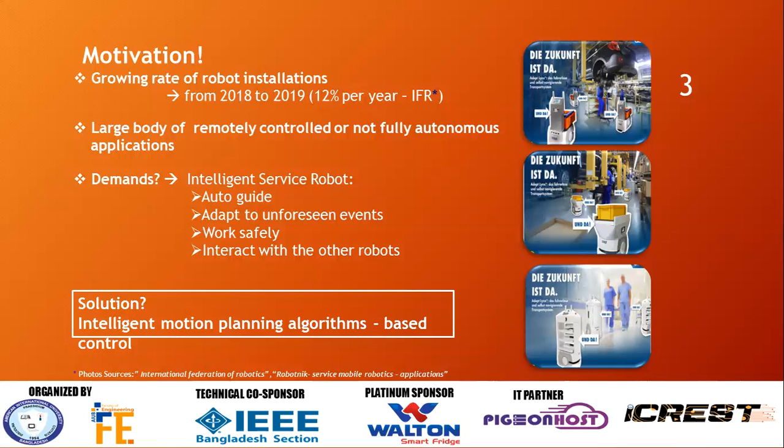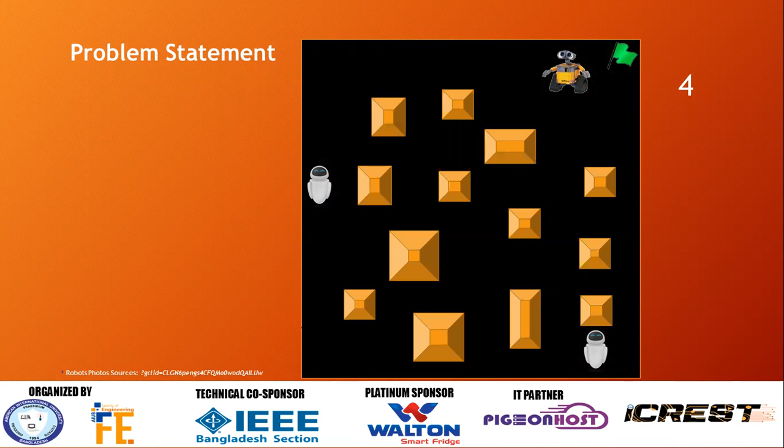The problem statement is a multiple mobile robots workspace with many static and dynamic obstacles in different shapes and locations. The mission of each robot is to plan its own optimal motion from the start point to the target point. So the first question to be answered: which path to take in terms of optimality?

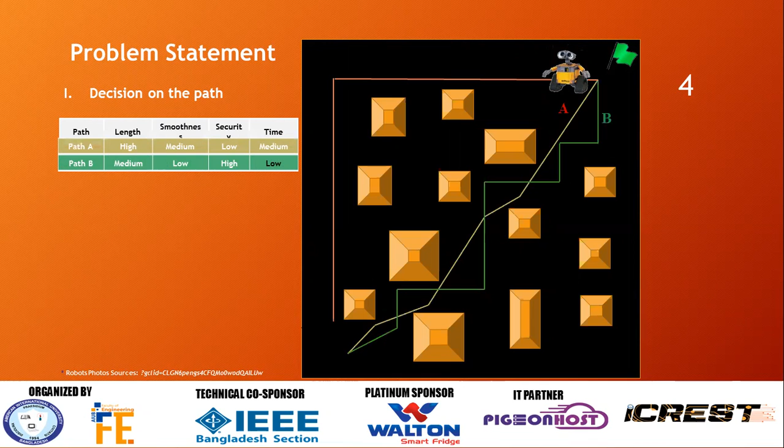As can be seen, although path A is the shortest one, it has the lowest safety performance. Even though the best safety performance is in path B, its length and smoothness are not the best. On the other hand, the best smoothness performance is at path C with minimum number of line segments, even though it is the longest path.

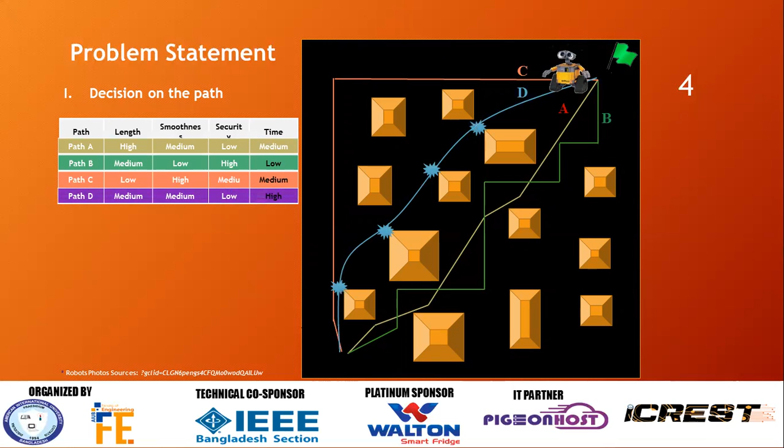And path D has a minimum time smooth curve. Nevertheless, it has low safety performance. So the second question to be answered: how to generate an optimal path as a trade-off among all of these objectives, as can be seen in the dotted path.

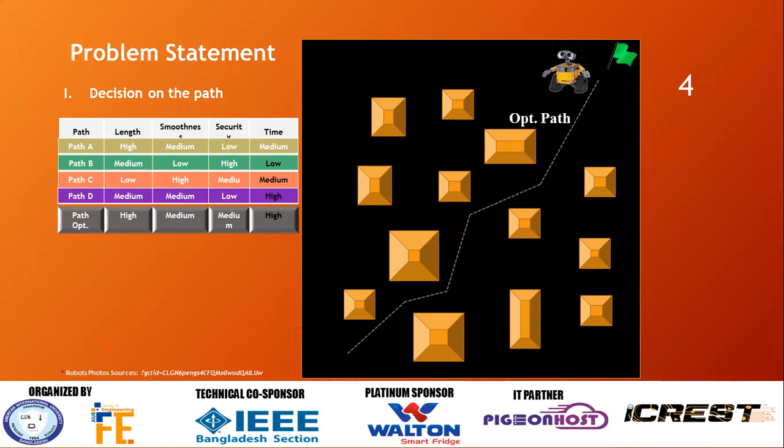And the third question to be answered: how to coordinate with other robots and avoid the collision with them and unknown dynamic obstacles. To solve all these problems, we need an efficient motion planning algorithm.

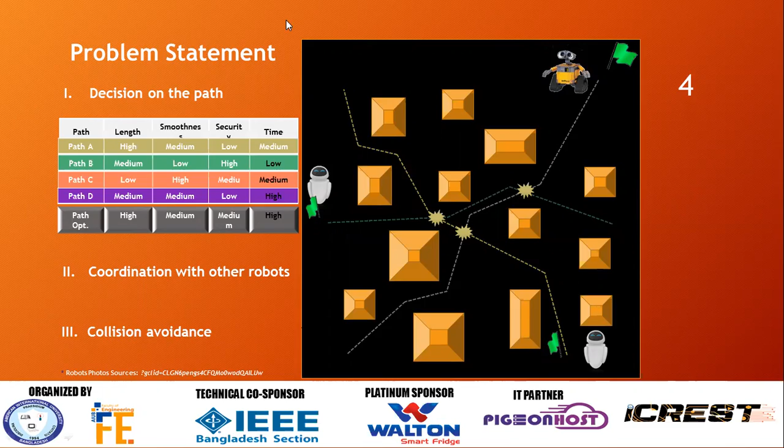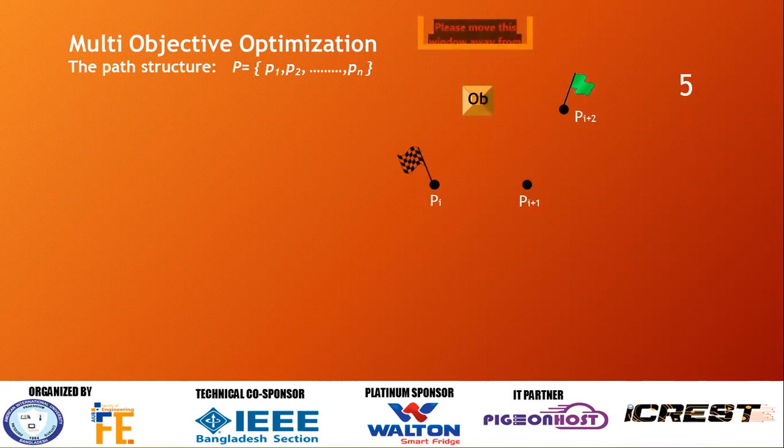Multi-objective optimization. The feasible path structure contains a set of points from the start point to the target point. The fitness function in our proposed scenario is a weighted summation of multiple objectives in terms of length, smoothness, safety, and time.

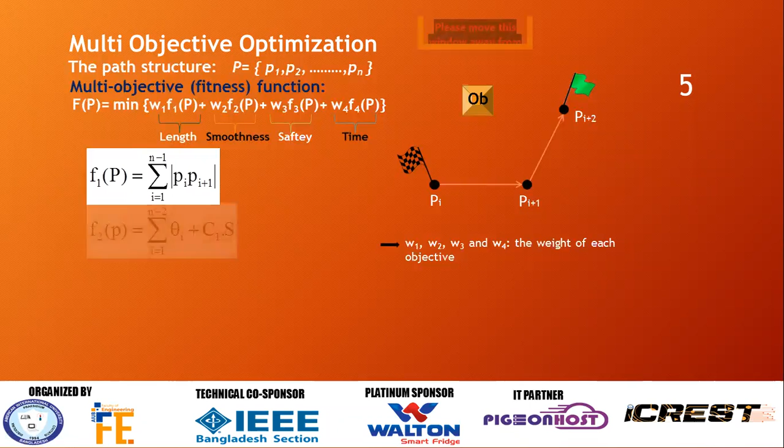F1 is the total length of the path, which is computed by Euclidean distance. F2 is the path smoothness, which means total angles of all path line segments and the number of line segments in the path. F3 is path safety, which means the sum of shortest distance between each path point and obstacle. F4 is total time for robot motion from start to the target point.

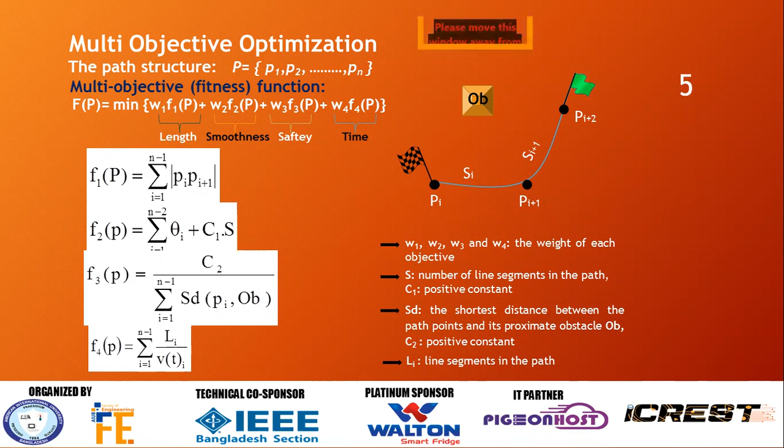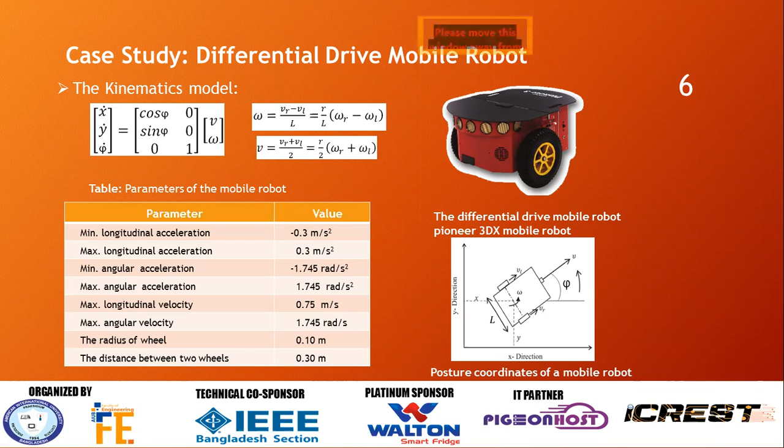So by minimizing the overall fitness function regarding the assigned weight of each criterion, a suitable optimal path will be obtained. Case study. The kinematics model of the robot case study that has a differential drive system is used. This table shows the values of model parameters for the mobile robot that are used for trajectory generation.

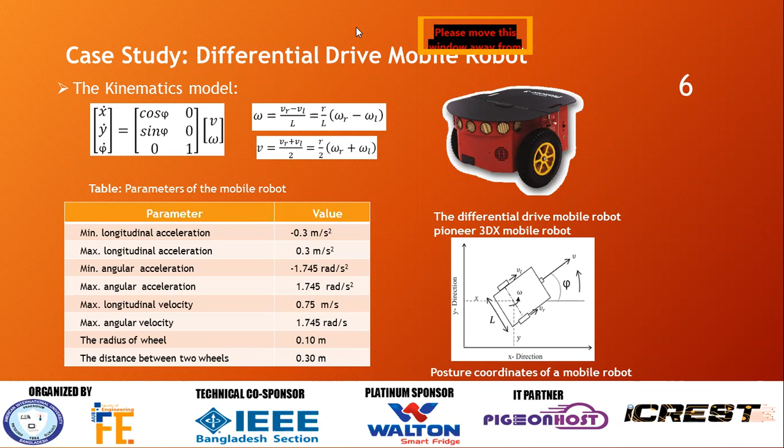In the first part of the study, a new proposal for finding the optimal path by mobile robots in a static environment is introduced, wherein the path planner is designed on this basis that included a modified genetic algorithm using the A-star algorithm.

And in the second part of the study, fuzzy logic control has been proposed and integrated with the selected algorithm for multiple objective optimized path planning individually and collision avoidance between each robot and other obstacles. So in this scenario, each robot is considered as a dynamic obstacle by another robot. So the second part of the work was designed as a motion controller to avoid such collision.

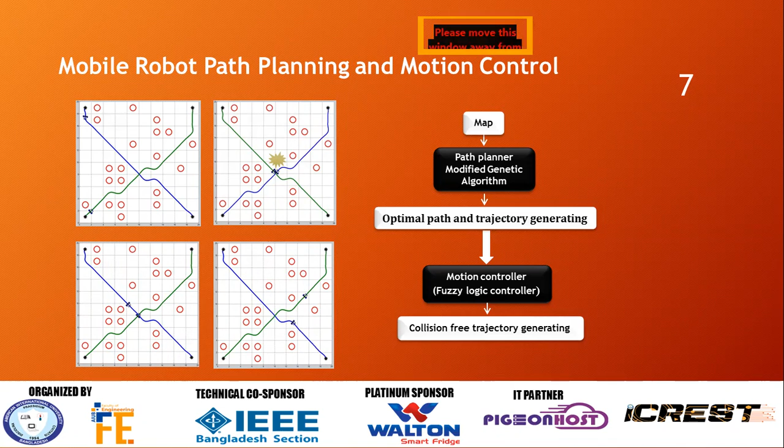And in this part, a fuzzy inference system was designed to safely avoid the collision by slowing down the low prioritized mobile robot. So the proposed fuzzy logic controller is based on the exact location of robots to be controlled, and one of the robots will be considered as a higher priority than the other robot.

So the designed controller has two inputs, namely the planned velocity of the controlled robot and the distance between robots, and one output named controlled velocity. For the planned and output velocity, 9 membership functions have been used. For input distance, 2 membership functions have been presented, where each function has a particular description.

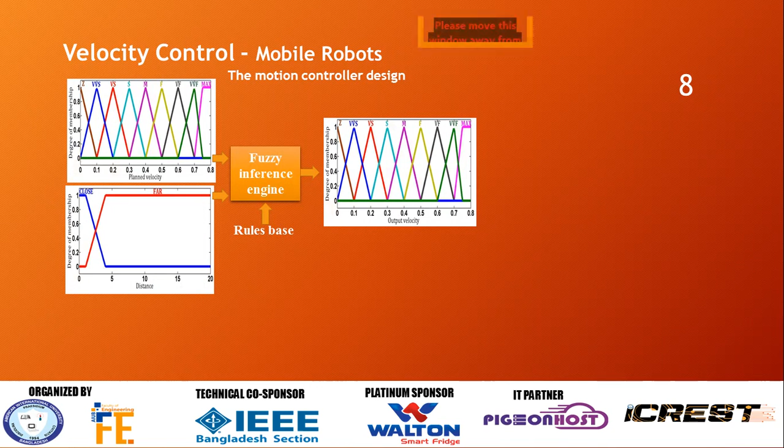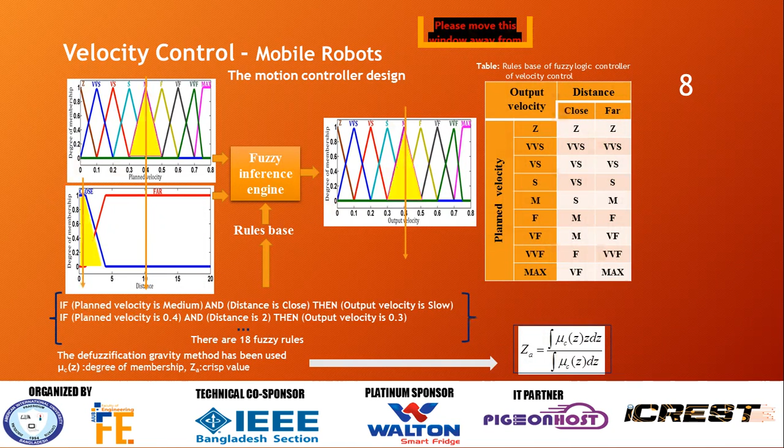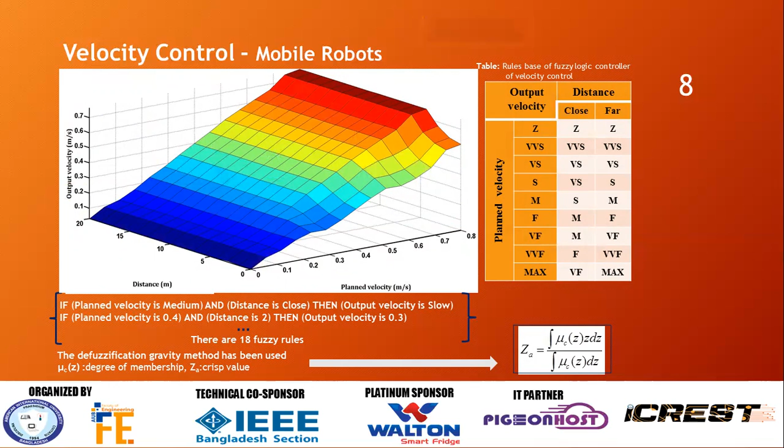And the input domain of the system is related to the output domain via a set of rules, as can be seen in this table, and the surface viewer between input and output. The output is calculated by the most common defuzzification method, which is called the center of gravity method.

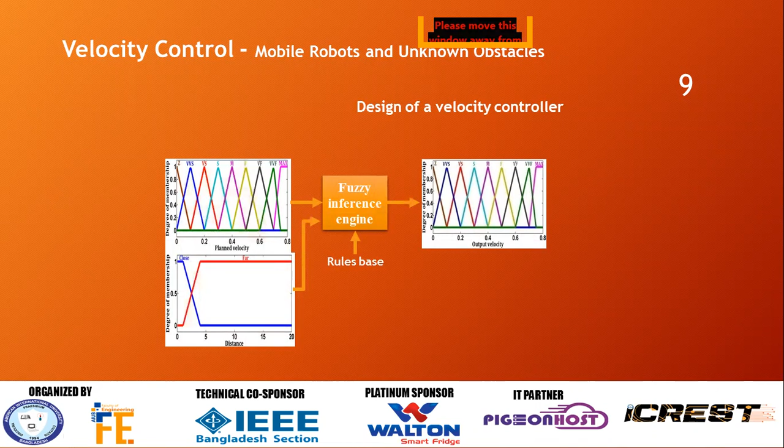However, the previous design doesn't take into consideration a non-dynamic and static obstacle environment. So the scope of the work increased to also avoid non-dynamic obstacles with a small modification by adding an input on board, the obstacle detector, to control the velocity of mobile robots and avoid collision.

Thus, to recognize non-dynamic or static unknown obstacles, a probabilistic roadmap is required to inform the mobile robot about its free or occupied space.